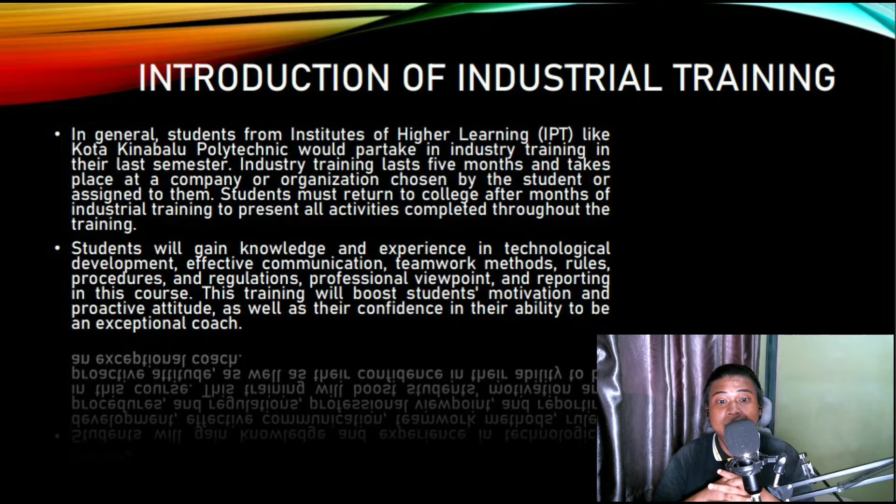Students will gain knowledge and experience in technological development, effective communication, teamwork methods, rules, procedures and regulations, professional viewpoints, and reporting in this course. This training will boost students' motivation and proactive attitude, as well as their confidence in their ability to be an exceptional coach.

The objective of industrial training is to expose students to real-world work experiences while also providing them with knowledge gained via hands-on observation and job performance. Students will gain skills in work ethics, communication, management, and other areas as a result of their industrial training. Furthermore, this hands-on training program enables students to connect academic knowledge to real-world applications in the industrial business.

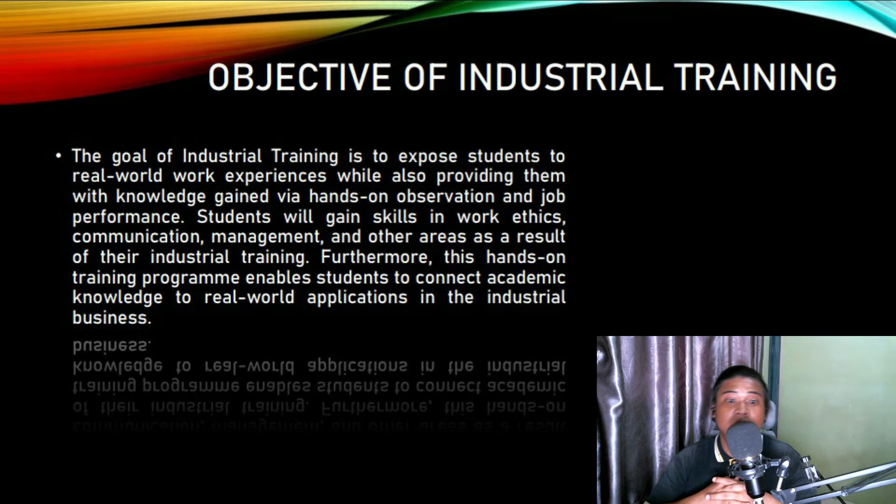For the organizational background, TBT Piling Sabah Sendirian Berhad was founded in July 2013 by the Managing Director, Mr. Tan Peng Lam, in order to offer the local construction market alternative high-quality reinforced concrete pile products at competitive prices and a one-stop shop organization for piling installation services.

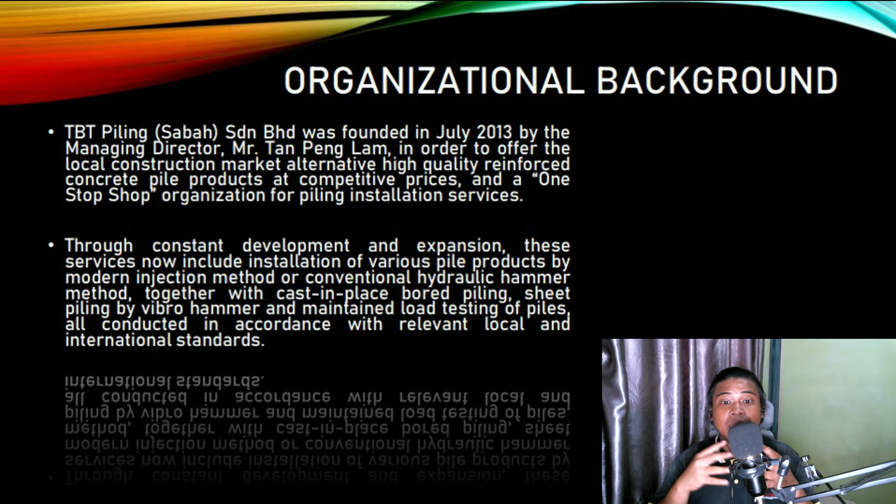Through constant development and expansion, this service now includes installation of various pile products by modern injection method or conventional hydraulic hammer method, together with cast-in-place bore piling, sheet piling by vibrohammer, and maintained load testing of piles, all conducted in accordance with relevant local and international standards.

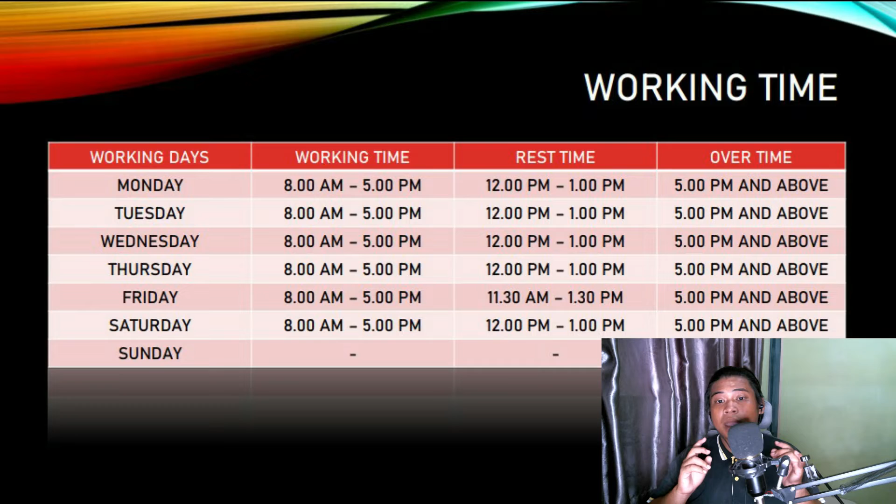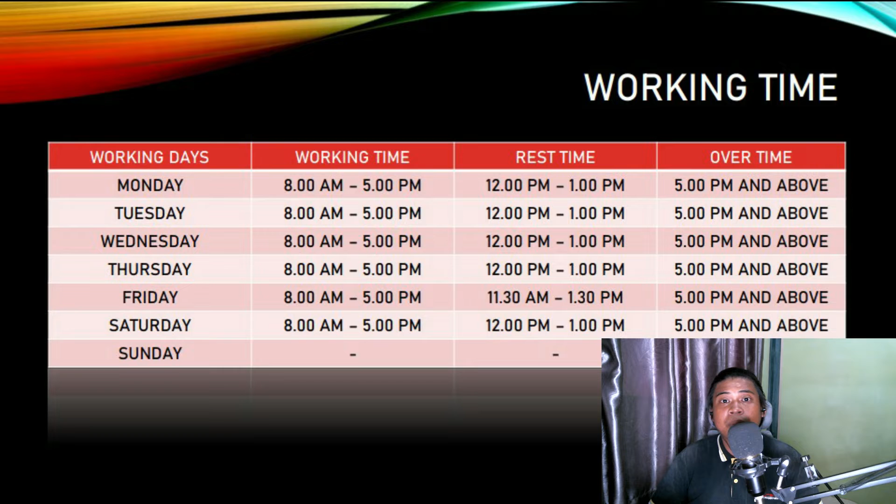For my working time, it is from Monday until Saturday, and the working time is 8 a.m. until 5 p.m., while our rest time is 12 p.m. until 1 p.m. For overtime, it is from 5 p.m. and above, and usually our overtime lasts until 10 p.m. or midnight, 12 a.m.

Bore pile, also known as a drill pile, is a type of reinforced concrete foundation used to support structures that have high vertical loads. Bore pile is a concrete pile that has been cast in place on the construction site. This is in contrast to other concrete pile foundations that use prefabricated concrete piles such as spun pile and reinforced concrete square pile (RC pile) foundations.

Bridges, large structures, and massive industrial complexes all require deep foundations, which is why bore pile is widely used for it.

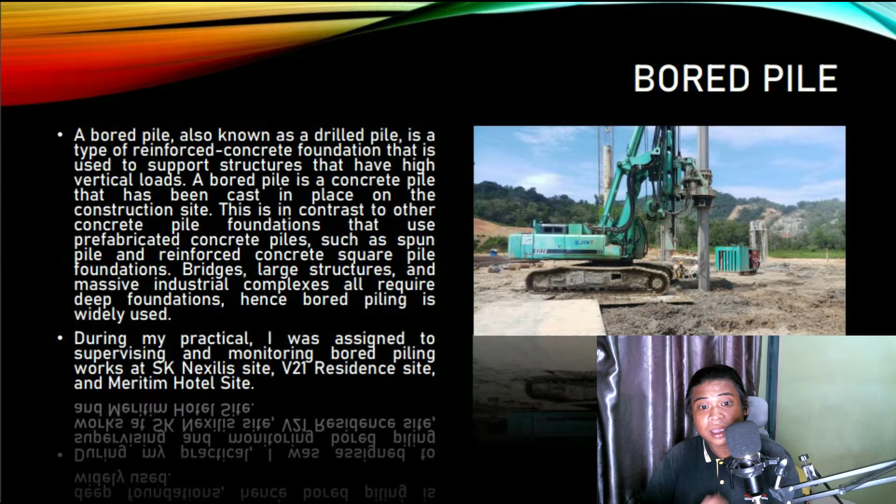During my practical, I was assigned to supervising and monitoring bore piling works at SK Nexilis site, V21 Residence site, and Meritim Hotel site at Bandaran.

Bore piling work must be performed by a bore pile operator. This is a highly specialized operation that necessitates substantial knowledge and experience in bore pile building and engineering, as well as soil and site condition.

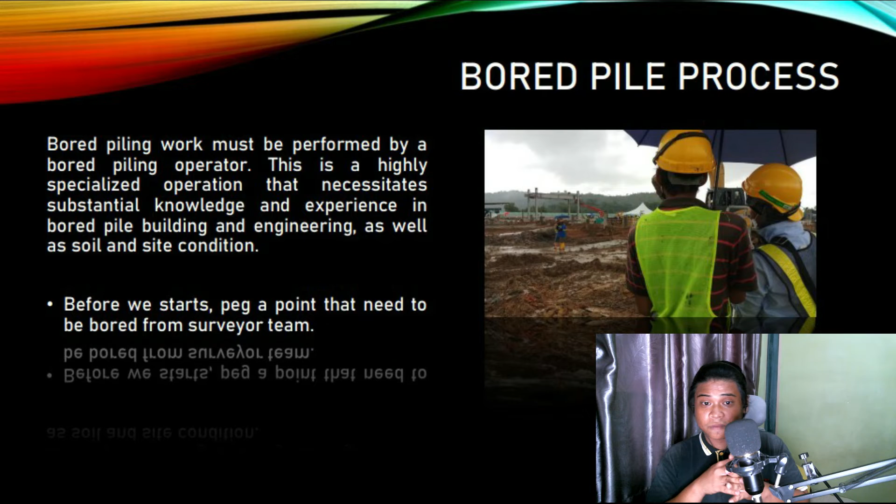So, before we start the work, we must peg a point that needs to be bored from the surveyor team, as you can see in the picture.

The first step in installing a bore pile is to use a bore piling machine to drill a vertical hole in the earth. Then, a temporary steel cylinder or casing may be inserted into the ground during the drilling process until the pile is poured with concrete.

This will remain in place in the upper half of the bore hole. Then, after the casing is inserted into the ground, the boring process will continue until the termination depth.

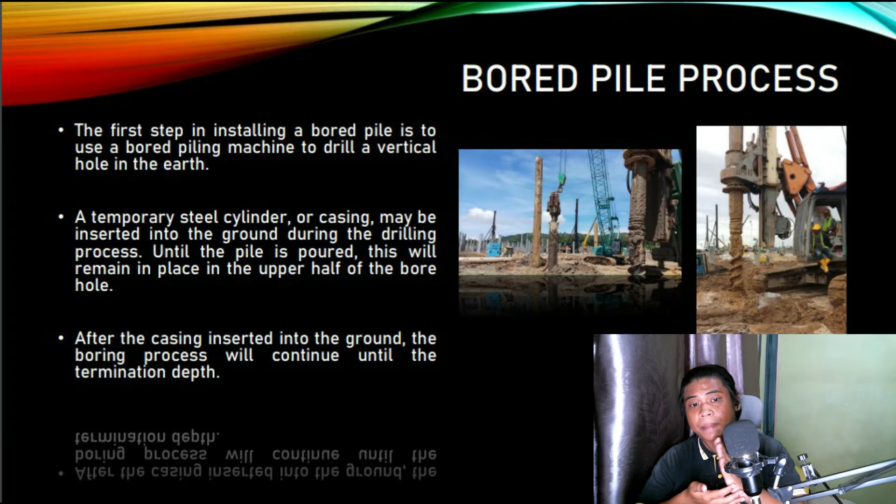After the hole has been bored, the consultant and main contractor representative will witness and check the depth to see if the borehole depth is acceptable, which is the termination depth. Then a framework made of reinforcing steel rebar cage is constructed and dropped into the hole after finishing witnessing the termination depth with the consultant, after which the hole will be poured with concrete.

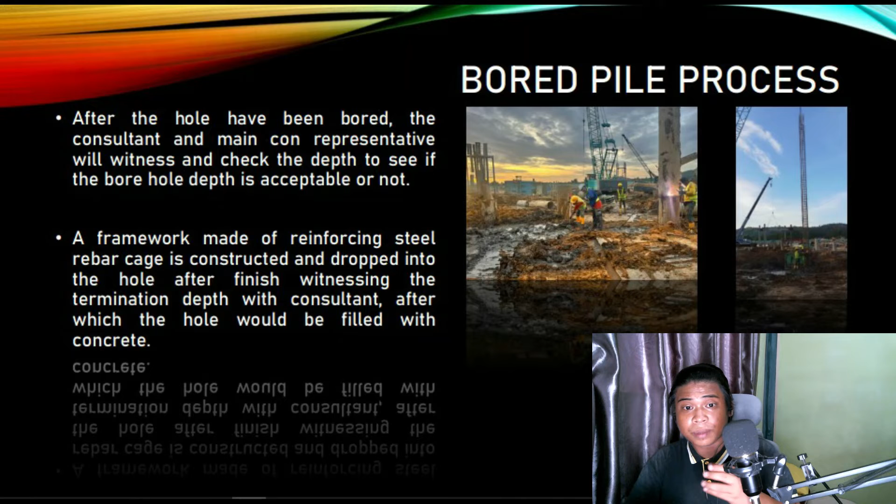As for the point load test, it should be done during the boring process to find sandstones and rocks for determining the socket length for the borehole. So from the strength of the stones, the consultant can determine how much length should be used for the borehole.

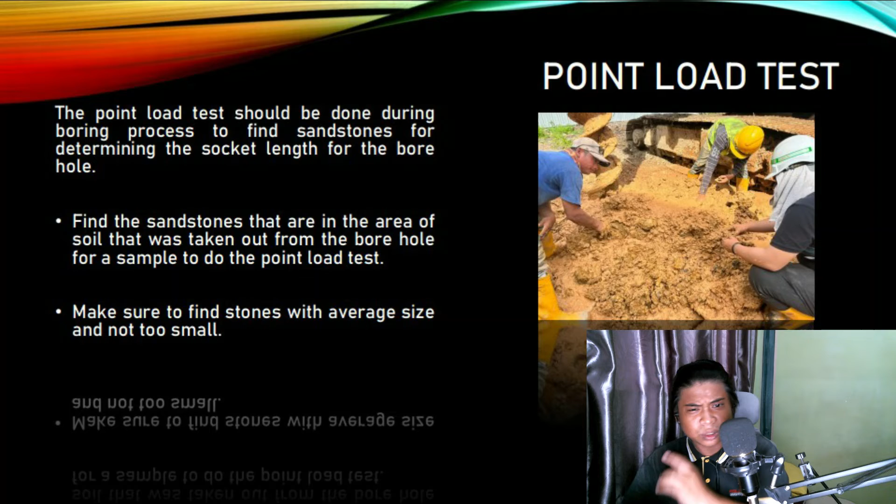The first step is to find the sandstones in the soil sample taken out from the borehole to do the point load test. Make sure to find stones with average size, not too small. Then measure the dimension of the sandstones using a vernier caliper.

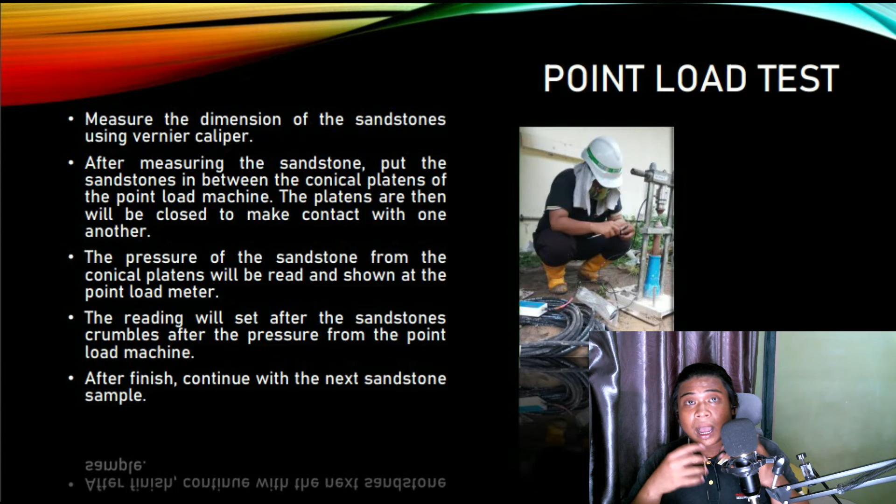After measuring the sandstone, put it between the conical platens of the point load machine. The platens will then close to make contact with one another. The pressure of the sandstone from the conical platens will be read and shown at the point load meter. The reading will be set after the sandstone crumbles from the pressure. After finishing, continue with the next sandstone sample. During my practical, we used only 3 samples for each meter.

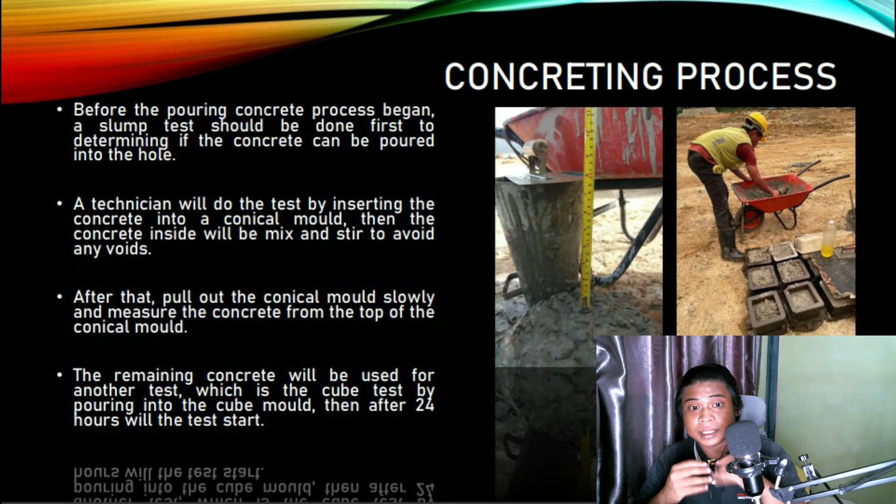As for the concreting process, before pouring begins, a slump test should be done first to determine if the concrete can be poured into the hole. A technician will do the test by inserting the concrete into a conical mold, then mixing and stirring it to avoid any voids inside. After that, pull out the conical mold slowly and measure the concrete from the top of the mold.

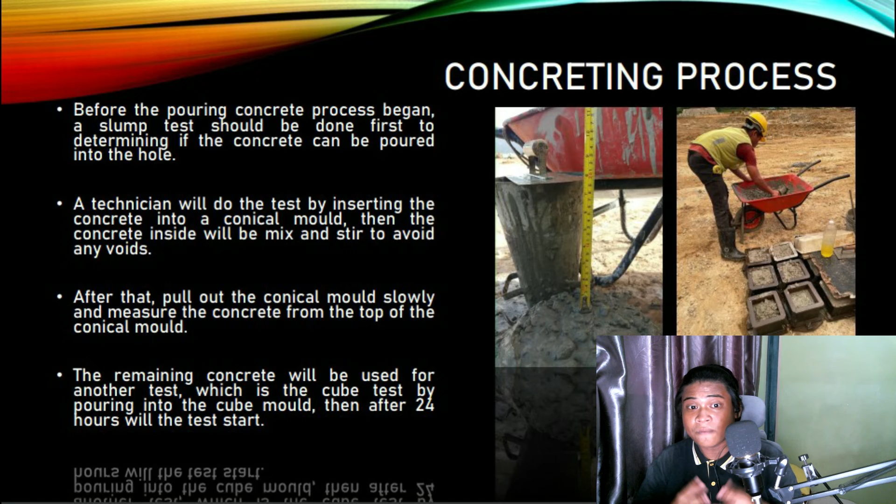The remaining concrete will be used for another test, the cube test, by pouring into the cube mold. The test will start after 24 hours. After the slump test, the lorry concrete will go to the pouring process. After pouring finishes, the casing that was inserted during the early process will be pulled out from the ground for finishing.

This is not the case for the PDA test, as the test requires the casing to remain in the ground. As for the normal process, all casings should be pulled out.

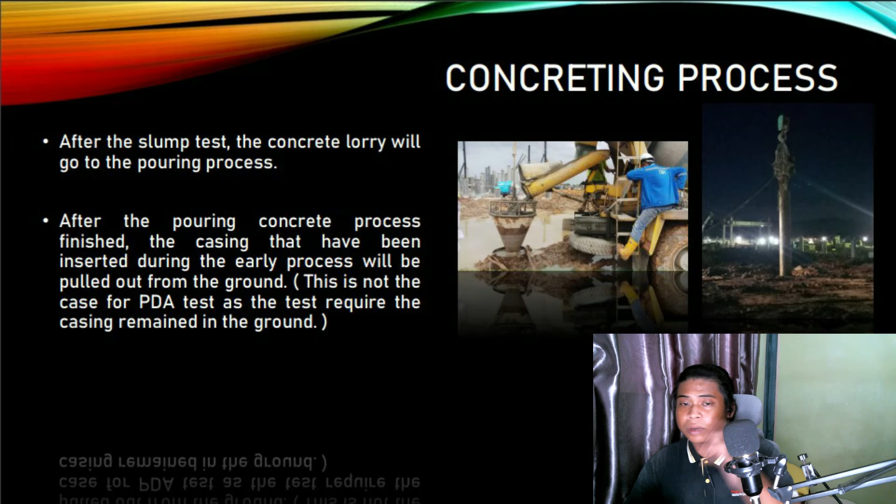For the findings and suggestions, from the early days until the last day I have been monitoring bore pile works. A lot of challenges occurred, such as delayed progress due to extreme weather, heavy rain and extremely hot weather, working platforms that keep changing due to muddy areas after rain and need repair before work can start, machinery troubleshooting during drilling which delays the boring process, and concreting in rainy weather, among others.

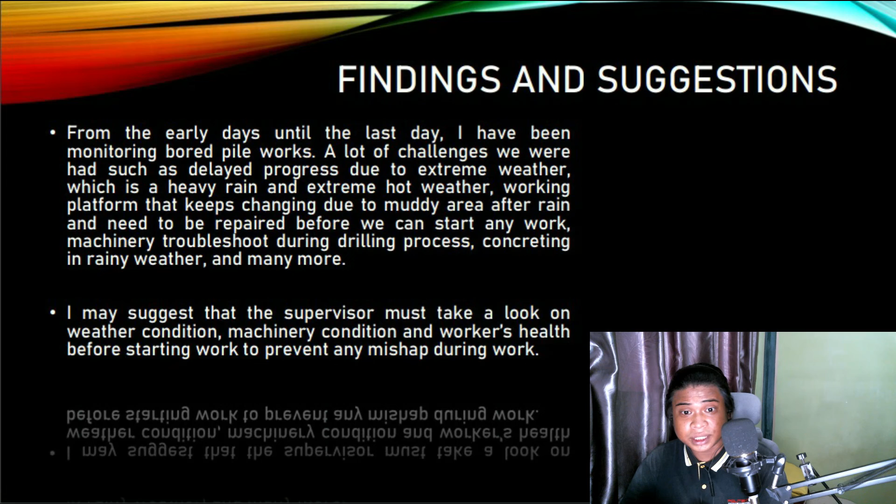So I suggest that the supervisor must check the weather condition, machinery condition, and workers' health before starting work, to prevent any mishap during work.

Finally, the conclusion. I can conclude that industrial training is extremely significant and provides many benefits for students who will graduate with a diploma or certificate, helping them gain experience before entering the real world, where students will be exposed to a variety of jobs or labor in the period allotted.

Students can learn to interact more effectively and politely with co-workers and supervisors through industrial training, and will also learn to be more disciplined in their work and more committed to their work and jobs.

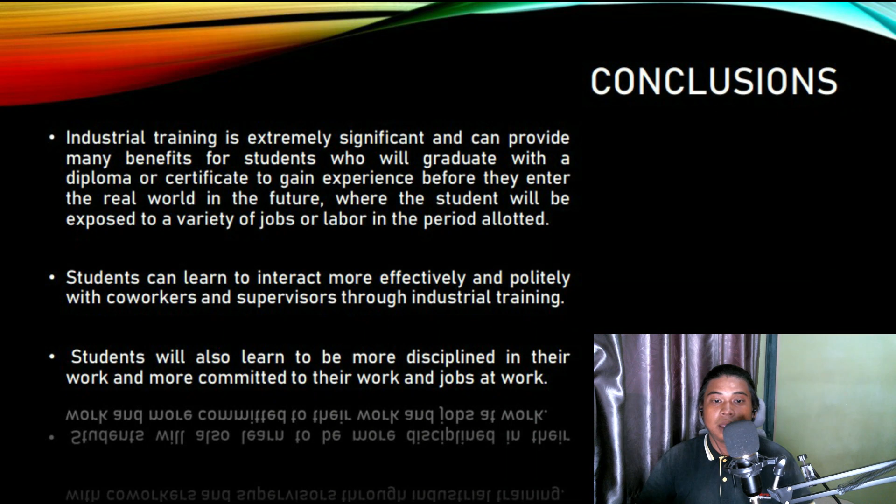And that's all for my presentation. Thank you.